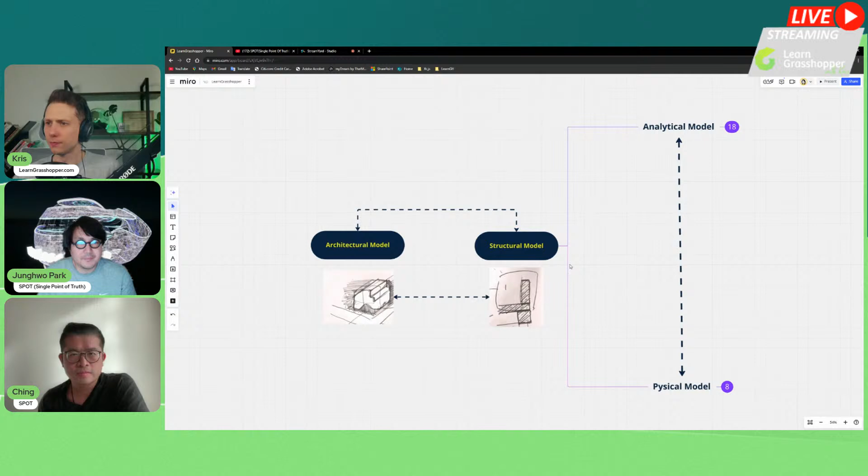I would like to present how architectural planning and structural design at a very early stage can collaborate. In practice, architectural design and structural design coordinate from the early stage, but there are still many challenges because conceptual ideas aren't fully known by either architects or structural engineers. When going from architectural concept to structural concept, the architect designs the general scheme of the building, and the structural engineer takes the core of the building structure and suggests the concept.

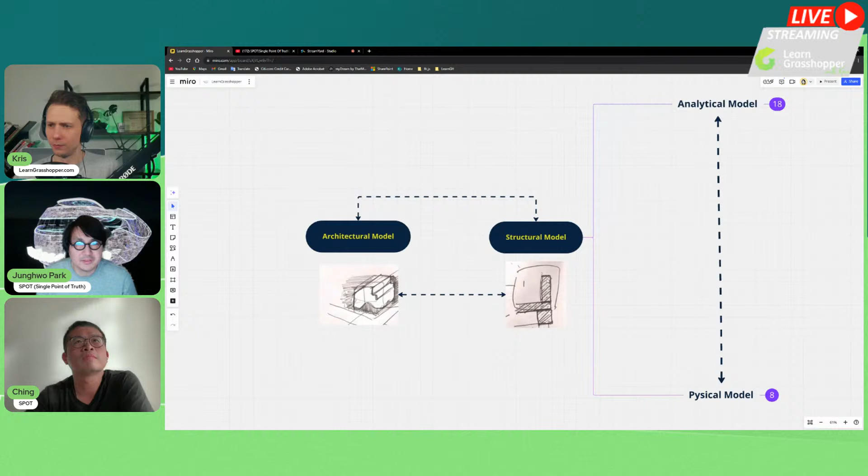In a structural model, we have an analytical model which, for a building project, contains building elements that are different from the physical model. The physical model has exact thickness, material, and parameters of elements, but the analytical model is a very simplified geometry, sometimes even approximated. This is a big challenge in how the architectural model and structural model can communicate with each other.

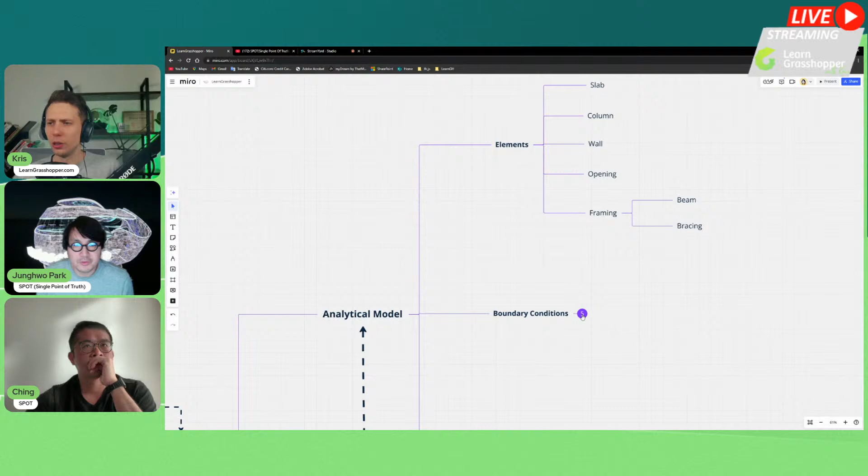Sorry to interrupt. In most cases we have differences between the analytical model and the physical model. Are there chances that sometimes they are the same, or are they always different?

They can have the same parameters, non-graphical information such as material property, material thickness, etc. The only difference between physical and analytical models is that the physical model represents real world geometry. So if it's a slab of 200 millimeters, it must be exactly 200 millimeters, whereas the analytical model is just a simplified surface, but can contain the thickness information as a parameter.

Does that answer your question? Yeah sure, you can continue.

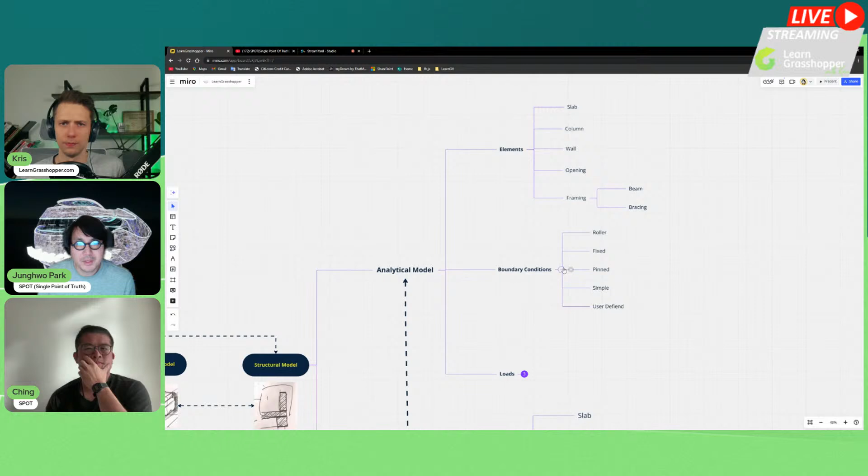Another big challenge I'll introduce later is that the analytical model has to be really precise. If there's any gap between each node of those elements, you'll likely end up with errors when calculating the structural analysis. There's also another component of the analytical model: boundary conditions, where you can have different types, and also loads, where you can set point, line, and area loads, and combine these load cases using specific codes for later calculation.

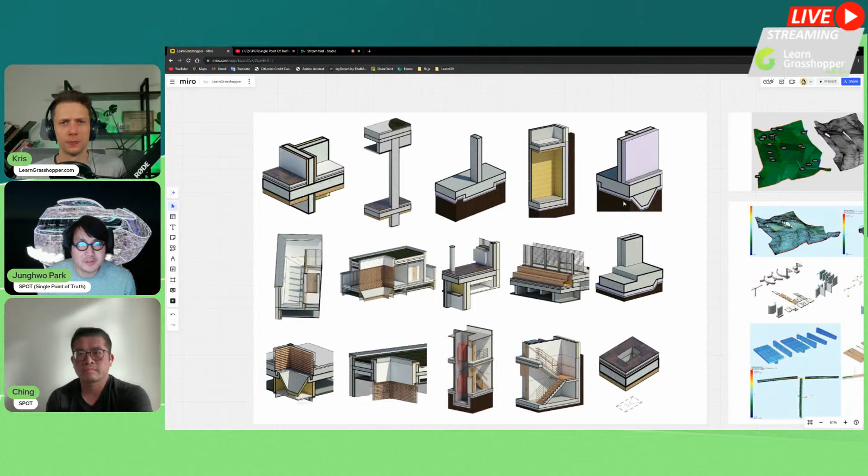Generally speaking, here's a visualization. On the left-hand side you can see a typical physical model including architectural finishes. What the structural engineer needs at the very beginning is to look at the components, and from those physical components such as slab, beam, column, or foundation, they need to simplify or extract the analytical model from that physical model.

This has a lot of challenges in general because there are different use cases depending on the situation. And when it comes to complex geometry, setting up an analytical model without a computational process is very, very challenging.

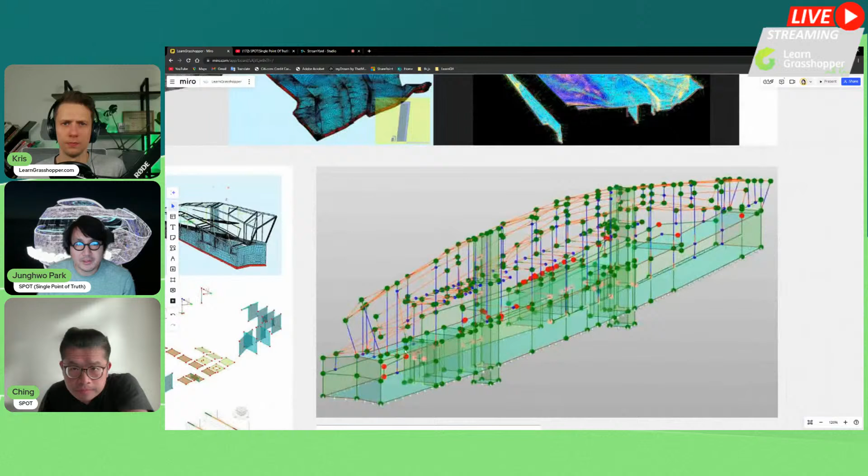Here is one good case. Straight walls or slabs are easy, but sometimes when a framing structure meets complex geometry, having an accurate analytical model is very difficult. If there's any small error between those node points somewhere, we will end up failing to calculate the structural analysis.

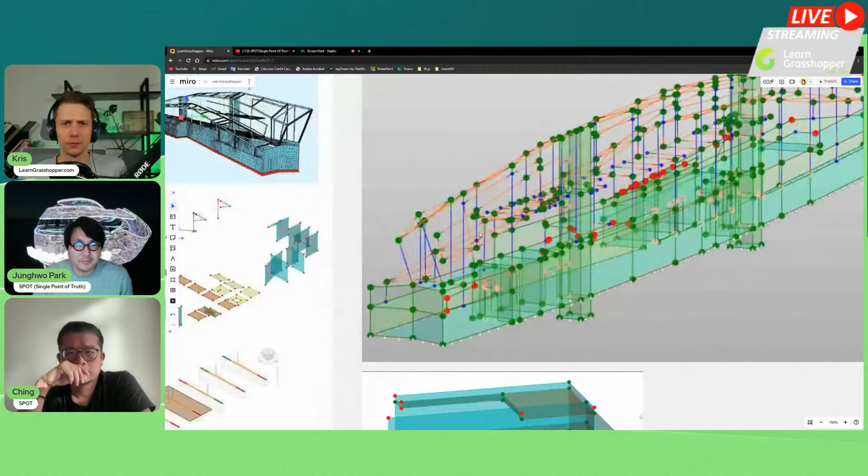So all points we're seeing in this picture represent connections. Every single bubble represents a connection. The green points are automatically connected, the blue points are manually connected, and the red points are not connected, but it doesn't affect the whole structure. This is a graphical representation showing, for instance, the end of a slab or wall, where it's not necessary to be connected.

All right, so I'm going to move on to the Revit screen. Especially today, we're going to introduce Rhino inside Revit, because Rhino has a certain freedom of geometrical operation. We're going to be looking at this in Revit, Rhino inside Revit.

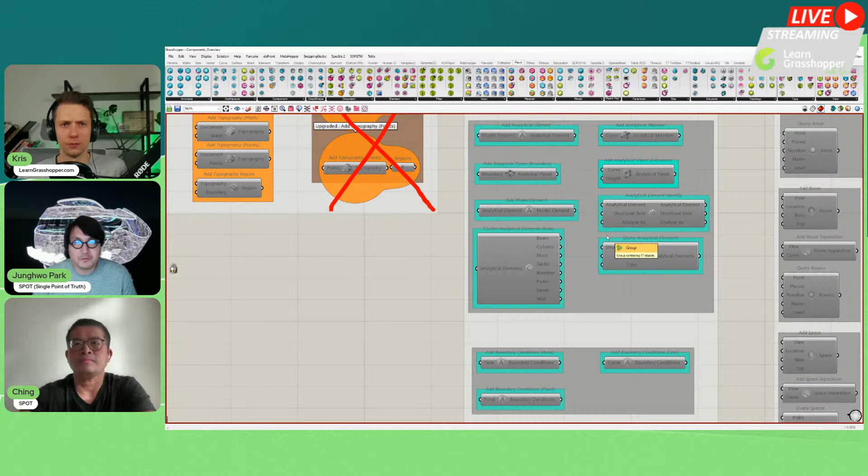It's still a work in progress, what McNeel developed, but we're going to look at those new components which let us create an analytical model from a physical model, or convert between physical model and analytical model. That's very useful, especially in the early stage when you get the architectural model from an architectural designer.

For those who don't know what Grasshopper is, they can think of Grasshopper as kind of like Dynamo, but better - that's a good explanation. I can't really say, but they both have strengths. Grasshopper for sure is very powerful when it comes to geometrical operation compared to Dynamo. Dynamo has certain charming points too, but Grasshopper performs much faster for geometrical operations.

Today we'll focus mostly on geometry. Making structural design is a geometry. Exactly. We have lots of components, but some parts are strictly for structural design. These are the components we're going to look at particularly today, where we'll create analytical elements from a physical model.

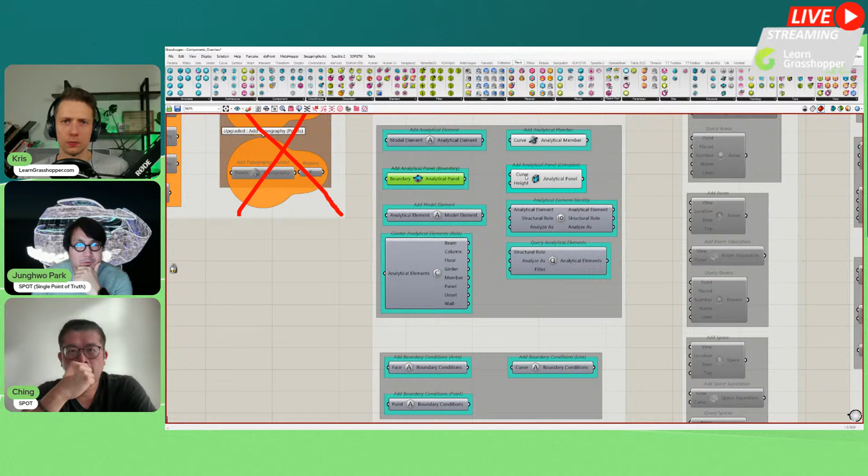Or we can add analytical model from Rhino geometry, such as curves or surfaces. We will convert Revit's analytical model to physical model, and there we can set some kind of boundary conditions. There are still a lot of components missing from Rhino.Inside.Revit.

I assume they're busy continuing to develop those components. For instance, setting up or adding load is missing. Today, Ching will show how to customize the missing components using Python programming.

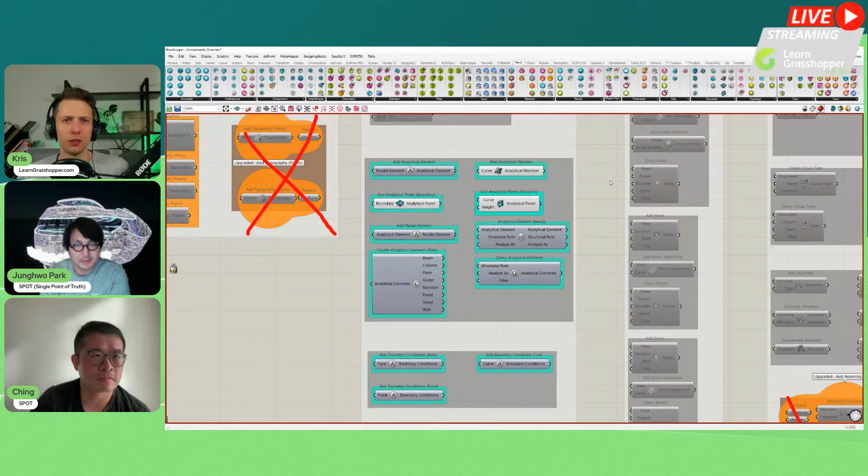Yeah, because this was introduced a couple months ago on this ribbon, and today I'm also going to show you that you don't have to wait until every component is created - Ching will later show us how to create our own with Python. So yeah, looking forward to this one as well.

Yes, so basically if you count all these components right now available in Rhino.Inside.Revit, removing text and grouping, when I counted it's about 456 components at this stage. Really? That's a lot - over 450 components are available, particularly the structural components.

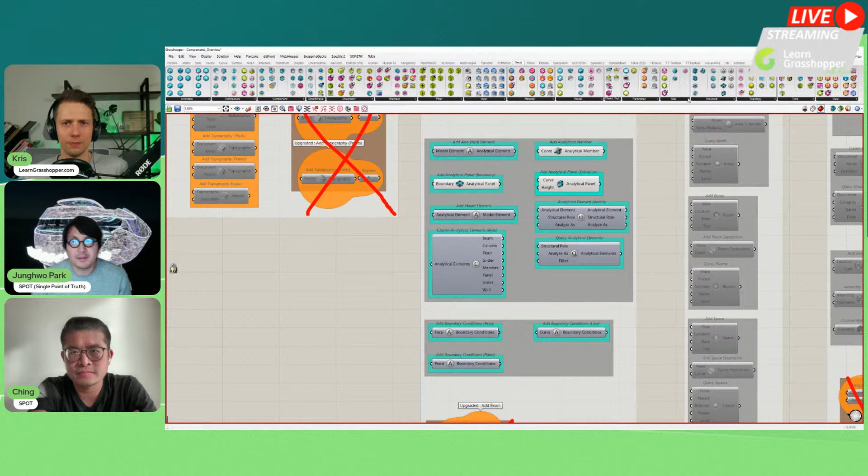Honestly, I first added this as a feature request to McNeel's forum and also their GitHub issue page or ticket page. Luckily, the McNeel developers are very responsive and they really hear what you need. So if you really need a feature request, you can always ask on McNeel's forum, and when it makes sense, they really develop it. I'm really appreciative of JP, Pedro, and Kike who accepted my request for those components and promised to keep developing those areas. So I'm really excited to present this.

But before I show the Rhino and Grasshopper definition, I'd like to explain a little bit in this short video how those architectural concepts or structural physical models can become analytical models at a theoretical level. So I'm going to play my video. Can you see my video? Okay.

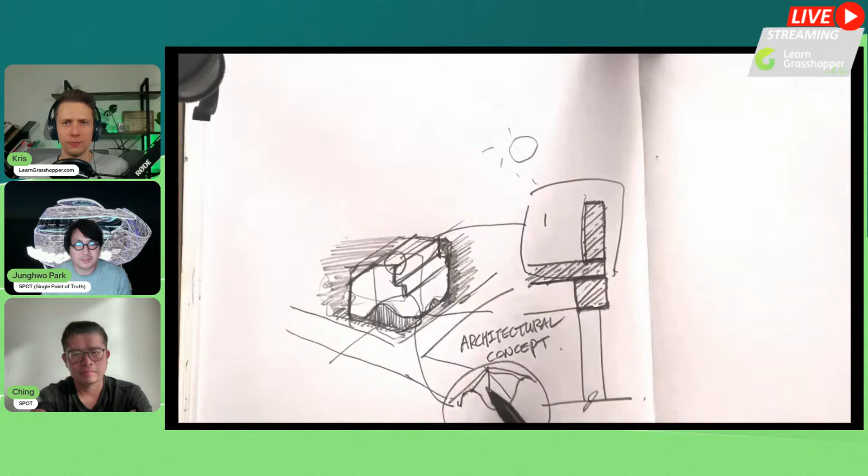Let's imagine here we have architectural conceptual design, and usually structural engineers take that core or shell of the structure and start to prepare what kind of structural concept should match the main structure or facade structure. For instance, here we have structural slabs, and the structural engineer takes these typical slabs, gets the center line of the slab, and creates an analytical surface. If there's a column, they extract the analytical line from the physical model and apply it as a structural column. At the end, you have a very simple static geometry.

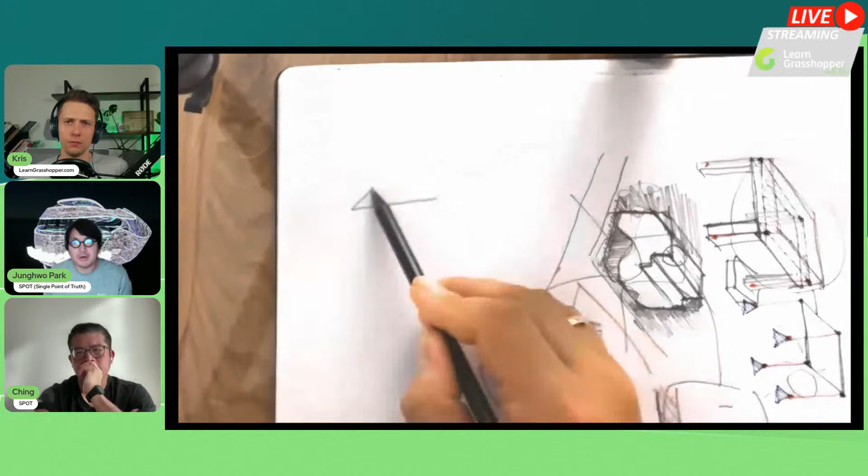We also have to think about boundary conditions. When you have different framing, for instance a downside beam, the beam also has to determine which orientation and where the structural analytical line must be aligned. So the structural engineer has to determine all this complexity to connect all these node points and boundary conditions to calculate their structure.

When the structure goes up and up, or down, there are certain complexities. They need to think about the loads, and the load depends on which kind of load case they assign to each analytical surface or element.

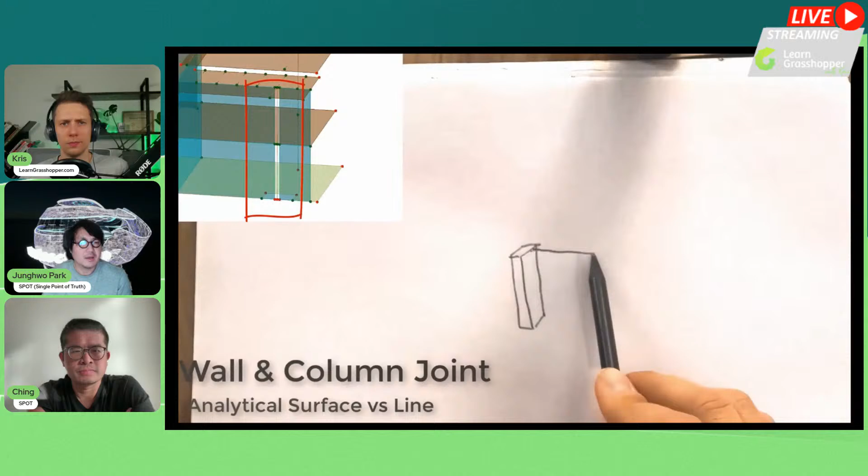When it comes to multiple components joining together, for instance between wall and column, you might end up with a small gap because of the deviation between the physical model and analytical model. Some software requires you to connect them even though there should be a gap, but some software doesn't matter - even though there's a gap, they can recognize the thickness parameter of the analytical model.

What's important in this case is that because the building story is divided, the analytical model is supposed to be also divided according to your building story. If you just create from the first floor up, it's going to be a mistake.

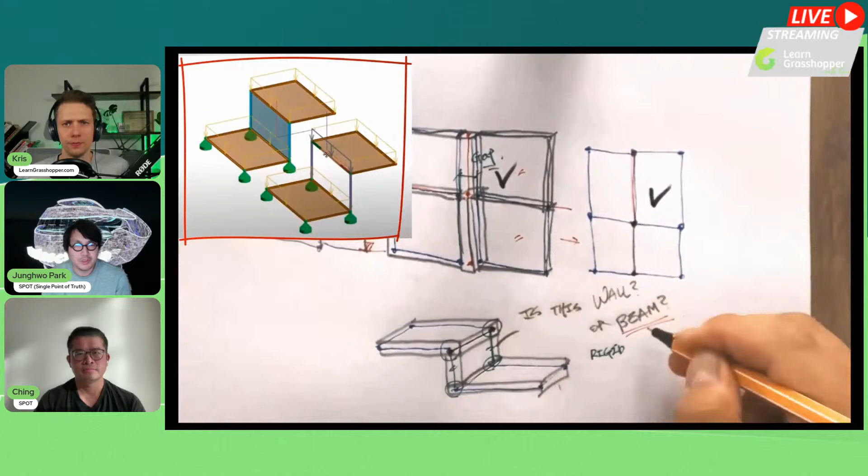Another challenge between physical model and analytical model: when a slab is jumping, you have to determine, depending on the distance, whether to make this a wall structure between the slabs, or should we make it a beam? There are some rigid condition differences, and the structural engineer should determine what's best for the calculation.

When it comes to beam systems, you also need to think about the nodes where they meet. Some software allows you to have a long span analytical line, while other software requires you to split each division. Of course, the node must meet each other without any gap.

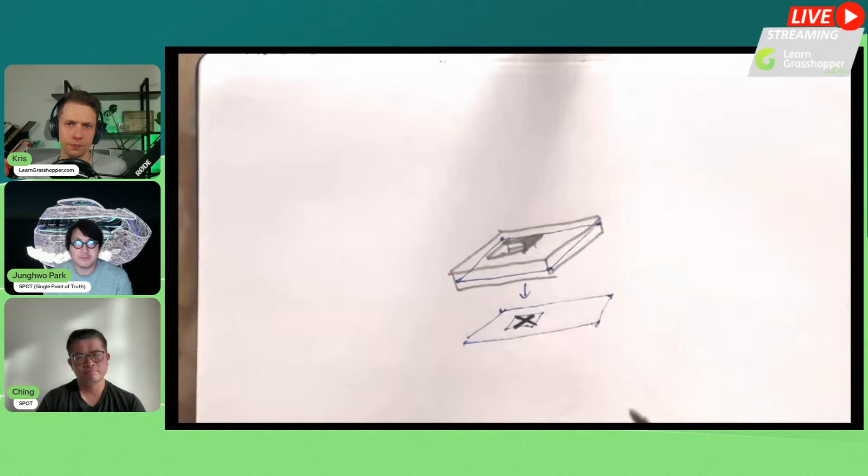There are also many slab openings in the structural model, and when the structural engineer calculates, they also determine whether we need an opening for this, or should we simplify without an opening. This use case is very important for them to think about all the openings around.

When a jumping slab is less than, let's say, 30 centimeters, then they just approximate those two analytical surfaces as one level, so there's not a super complicated calculation situation.

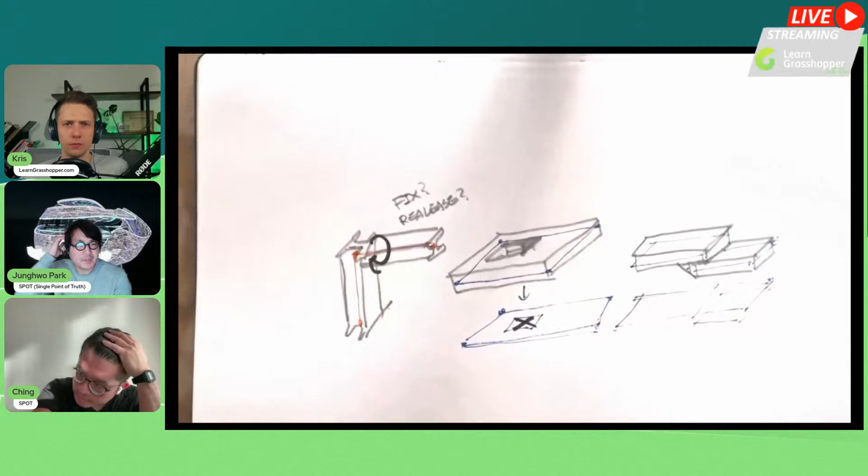When it's a framing structure, we need to think about nodes, and each node can contain different information, whether it's fixed or released, and if there's any rotation. The structural engineer usually takes all these conditions into account.

When there's a beam which is curved, sometimes they approximate the geometry, and this approximated geometry meeting another beam - that beam's analytical line must be connected to the approximated node points. It depends a lot on the calculation software. Some software doesn't require simplification if it's curved, but some software necessarily simplifies the curved beam.

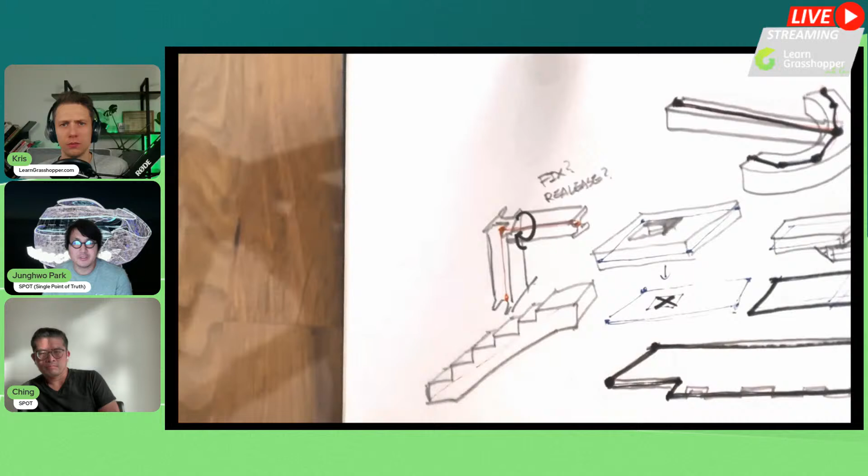When a slab profile is very complex, you can also approximate those complex slab edges and simplify them for calculation. Stairs are also a kind of complex geometry, but when it comes to the calculation for stairs, we just take the core of the stair structure and simplify that surface geometry for the calculation.

So that's the kind of scenario. Of course, when a wall is single curved, we can also approximate it and make it a bit straight in the analytical surface. But when it comes to double curve, then the challenges become very complex.

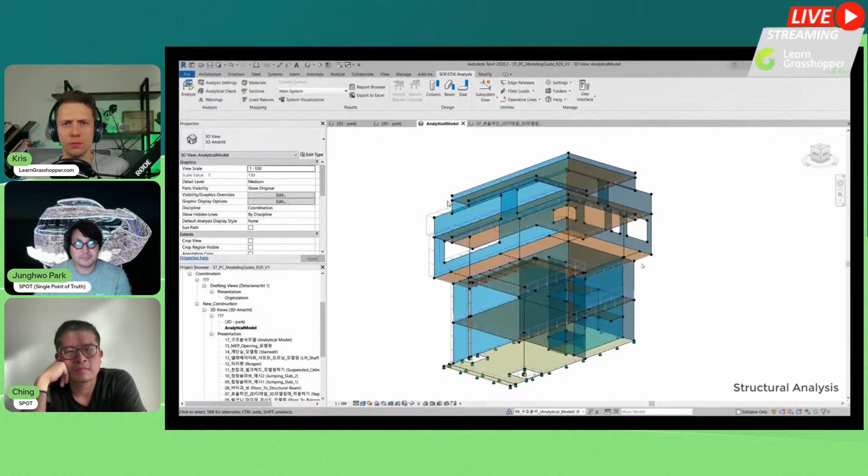As you can see, this is a typical case between the structural model and physical model converted to an analytical model, which you can calculate in structural calculation software such as Sofistik or Karamba 3D, keeping communication between the BIM model and calculation model.

So let me go show you the example that I prepared. Just before that, I have to say it's a really amazing video that you made. I assume you made all these drawings and this video.

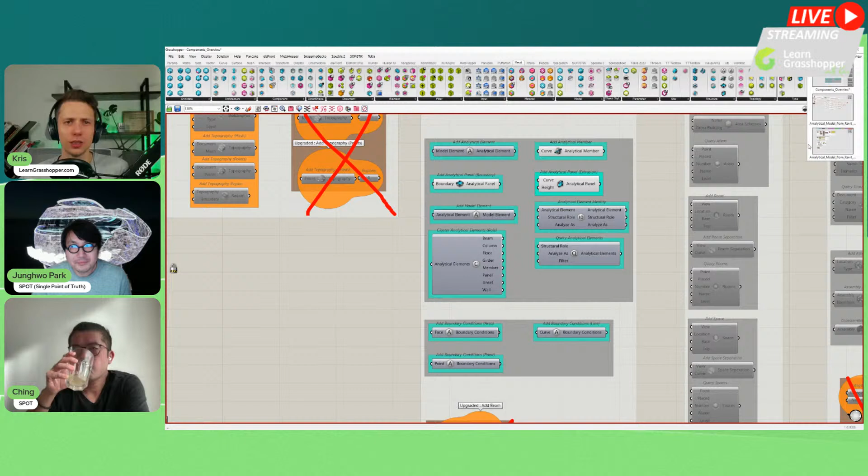Yeah, I did it. It's really a great knowledge refreshment for structural engineers, but I think it's also really important to understand the logic for architects. You're both architects - how much knowledge do architects need about this structural design simplification usually? Do architects care about it, or do they not care about all this structural design? I have to say it really depends on their partnership with the structural engineer.

What I observed in my last 18 years of experience is that these days the communication between structural engineers and architects is very smooth, and many companies work together within one organization. So in my opinion, this kind of culture or workflow is more and more encouraged between architects and structural engineers.

From my experience, I was working for a structural engineering office, supporting structural engineers to have such a model so they could just focus on calculation. It was lucky I was about 2.5 years working there, and that was quite enough time to gain this knowledge.

I think if you have structural engineers as a collaborator, then architects can always ask those questions to enhance their efficiency.

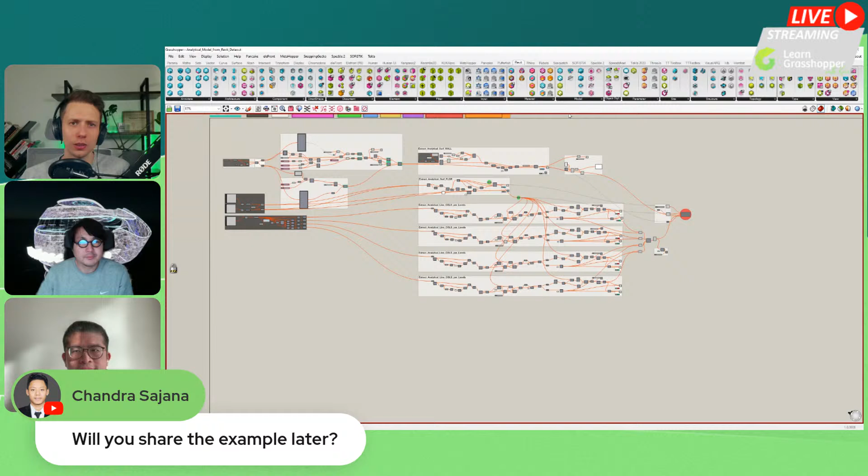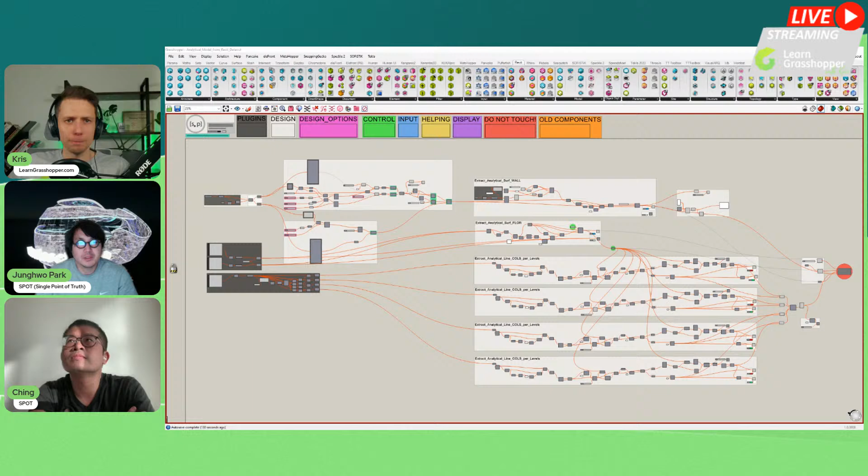So let's go to the main topic today: how we can use RHINO inside Revit. Normally if you have a standard Revit model and want to create an analytical model, these are two separate things. But bringing RHINO inside Revit lets us make one model that connects the two softwares. Imagine this is a very conceptual, simple model modeled in Revit.

I'm just about to extract an analytical model using RHINO inside Revit and generate that analytical model from the Grasshopper components, following the exact same theoretical part I presented with the drawings. I may not have enough time to explain everything, so I'll explain only the key points. At the end, we'll get this analytical model out of Revit components.

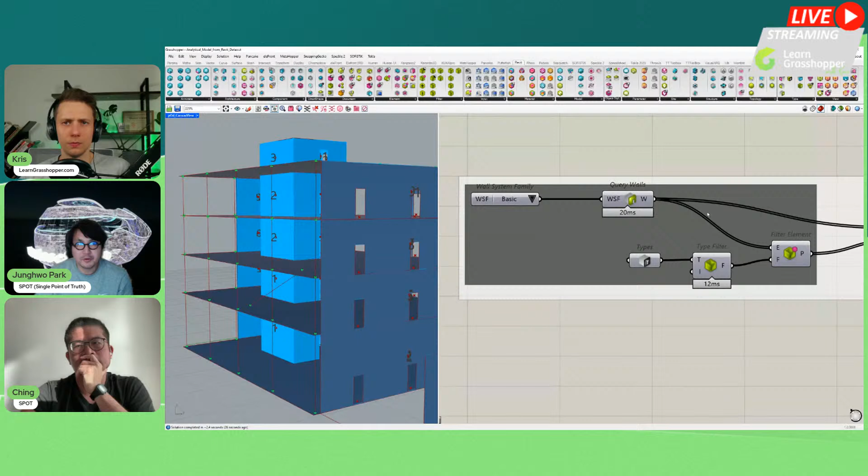What I'm doing here is first we filter and query the walls, floors, and columns. Based on that Revit geometry filtered from the RHINO inside Revit components, we distinguish certain parameters between the exterior side and interior side.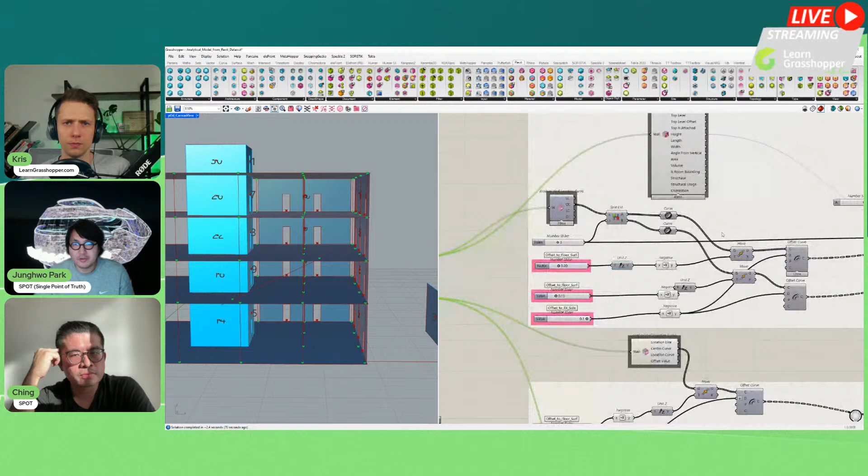When you have geometry filtered from the exterior or interior wall side, it's kind of obvious, and the geometry is now recognized as a Grasshopper preview. So RHINO and Grasshopper can start to understand these Revit elements as RHINO and Grasshopper geometry. The rest of the operation is mainly Grasshopper logic.

For instance, I just get the center line of the wall surface - in this case I push it to the slab edge to connect them, but we can control whether it's aligned to the middle, left, or right face, all using Grasshopper.

So what I'm doing is getting the wall structure, and then we extract based on the wall location line from Revit's wall geometry. From there we reference the wall height from RHINO inside Revit components, analyze the wall, and apply this height to extrude the surface in Grasshopper.

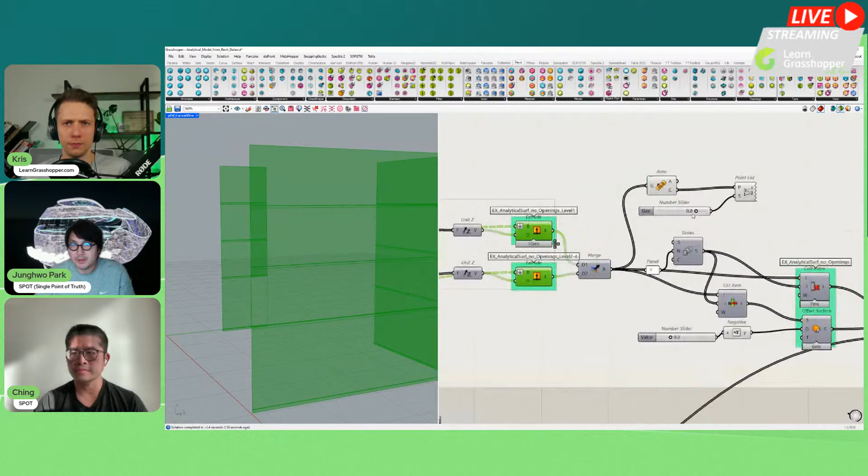There's a slab thickness that needs to be met between wall to wall, and we just do a simple calculation in Grasshopper to get that result.

You can see we can have an analytical surface without any openings, but we can also work with openings by extracting window or door opening information. We just do a simple Grasshopper operation to get the openings, and at the end you get that geometry with openings. We can set the design option - sometimes I want to calculate everything without openings, sometimes with openings.

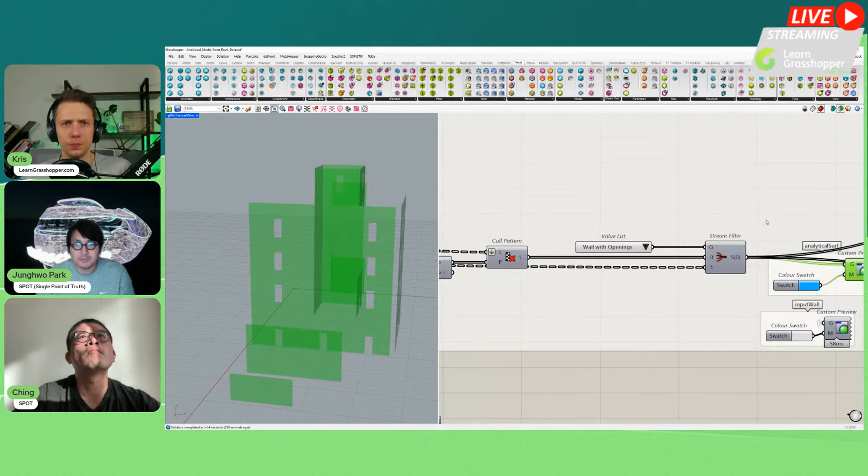We're using only native RHINO inside Revit components - no Python scripts. Everything is native RHINO inside Revit and Grasshopper components, no plugins apart from that. It's also important to mark: if I use a specific plugin, I always group them with a particular color from this template, so we can indicate which components use a plugin apart from the native Grasshopper components.

The same story goes for floor - we extract the floor from the built-in category, query them, and convert them as Grasshopper geometry. There's a difference between slabs and foundations, so we can differentiate.

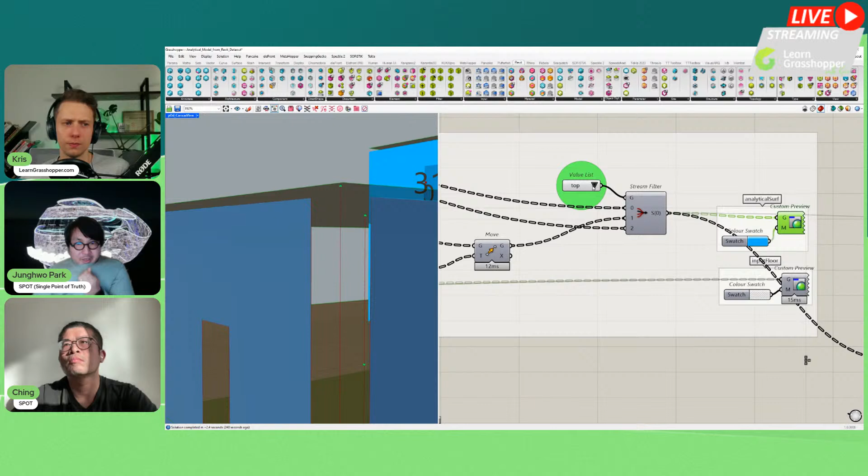At the end we get the analytical surface of the slab, and we can determine if this slab is going to be center, bottom, or top. Right now the script is matched to the center of the slab to align with all the verticals, but it's all possible to parametrically adjust this analytical model.

And I'm also extracting columns based on a particular parameter, and we just split that geometry of each level for the columns.

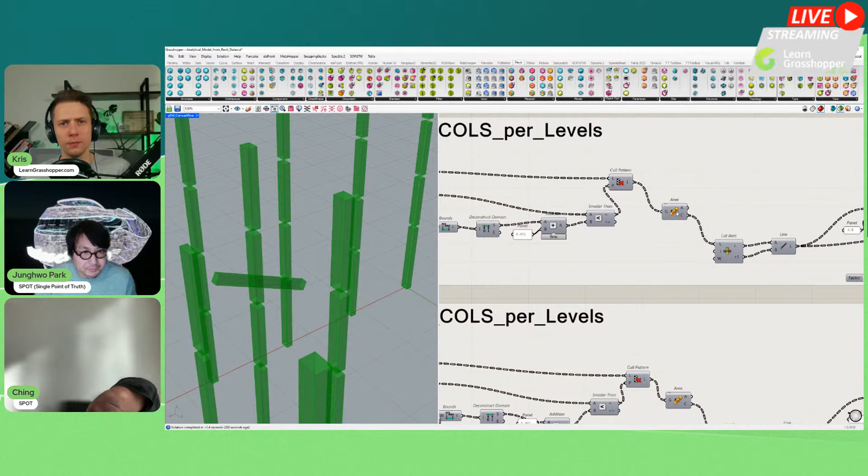What the rest of the script does is get the center point of each column, and we connect those center points as a single line, and the line needs to be extended to the slab level.

So we scale it up, and we shatter only the core lines we need for the calculation, and then we convert all this to a final analytical model.

So let's say whatever, if you have columns modeled in Revit in different ways, let's say as families, you can always make some simplification and build your analytical model as you want.

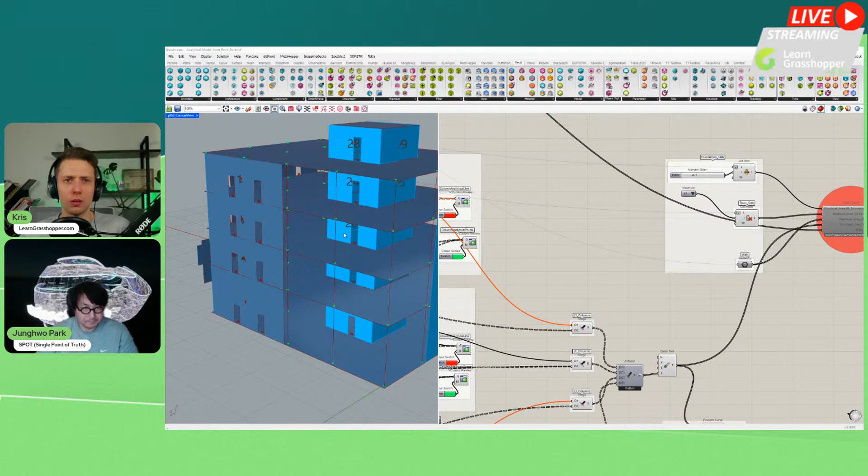For example, this script, they are linked to each other. If I move my column here, simultaneously you will see the column analytical model move according to this physical model, and when I move it back, the communication between them is very clear.

And as you can see here, the nodes show green points, meaning it's connected between the slab and the columns.

Is there any function from Grasshopper that if the point meets a surface it turns green? No, I just visualized it with a colored point, but it's when the point is meeting the surface.

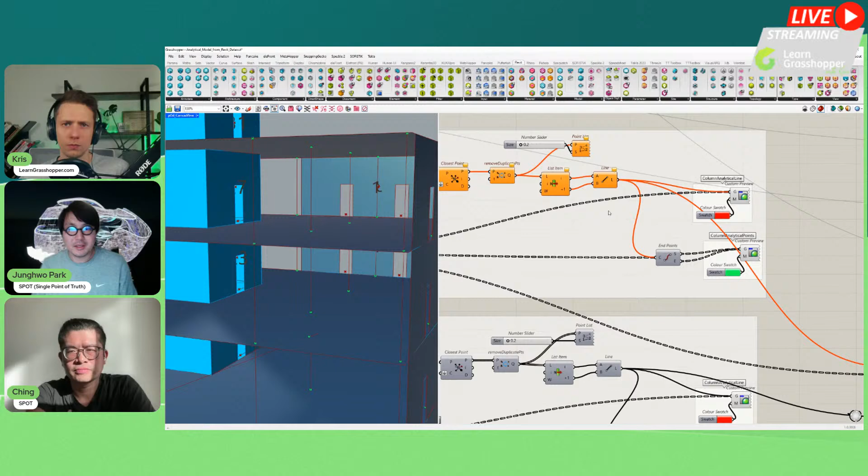We can set up a clash component, and when the clash component shows the number of clashed points, we can highlight it with color for example. There are many other solutions we could think about for quality control, but at the moment here in this script I'll just display it as a green color.

Yeah, and I really like what you showed when you moved your column in Revit. I think this is the most important thing because of all the changes, and it works also if you work on a multi-server with different users, right? If someone else is moving, let's say, a wall, door or column, it will also update your analytical model, so you will get new forces and so on.

And this is, in my opinion, one of the biggest advantages of using this connection. Exactly, that's the power of this parametric engineering, let's say.

And there are some components highlighting errors just because there is no relation for this particular model, but it doesn't affect anything for the later script.

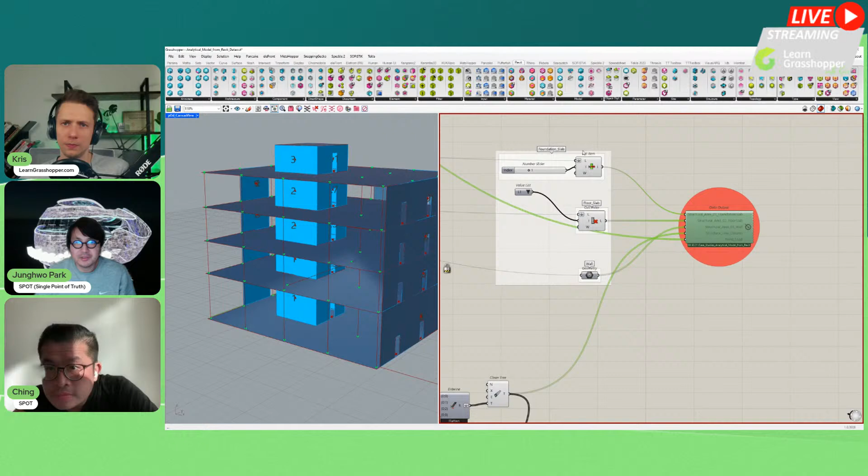And I often prefer to separate between the topics. So in this design definition, I'm just extracting only the geometrical model from the physical model. And what I use in this component is called data output. I can set the destination to stream the change into another Grasshopper definition.

So that one I'm going to introduce is here. I'm going to use data input components to stream any change from the previous script, and I can only focus on this analytical model part.

Sometimes I prefer it this way because of the file size and also performance, and it helps to maintain a separate script rather than one big chunk of script.

It's already really good. It's a really good tip because you don't have to work on one big Grasshopper file. You can separate them into different small files, which are of course faster, and you can open and maybe send them to a different person who can work on a different Grasshopper file.

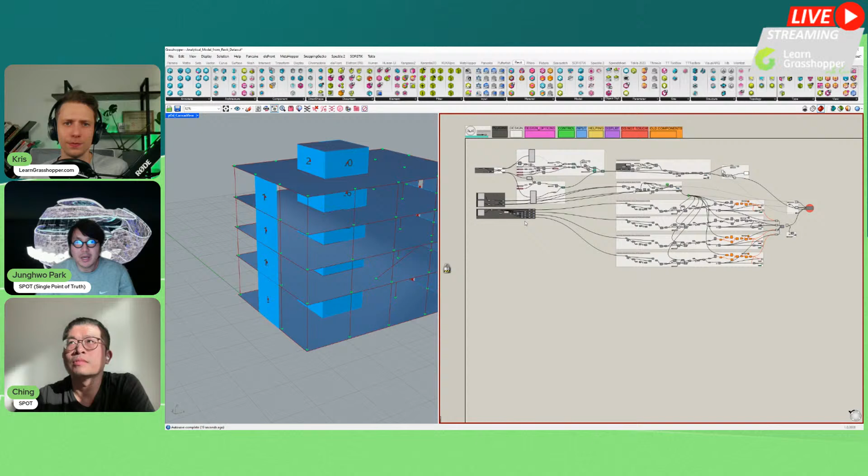Yeah, exactly. I can imagine this part of the definition is the architect's work who collaborates with their structural engineer. And the next script part is more the scenario of the structural engineer who obtains the model from the architects.

I'm just going to show you now. So if we use this data input component and define the source, this example's data output file format is going to be available anyway. If we link it, then it will stream any change.

Let me go and change from here. I don't need to actually change the Grasshopper. I'll just move one of the columns as I did before. But before any action, I would prefer to always lock the solver so we don't compute the Grasshopper definition.

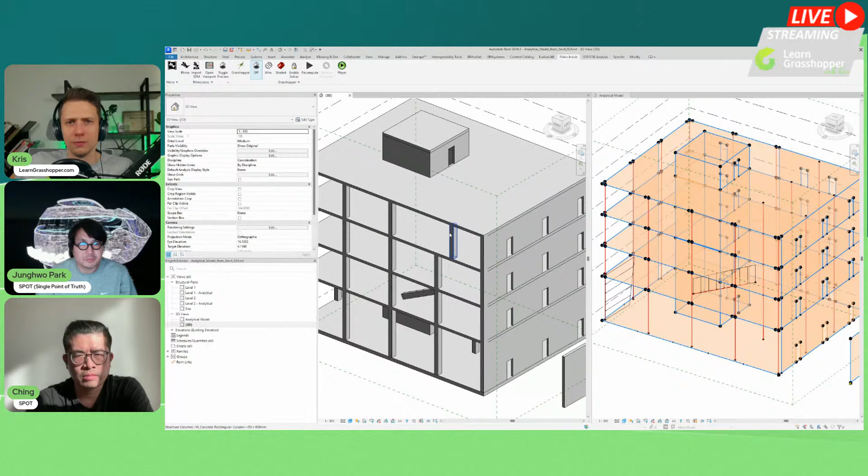So we just move it in the Revit model here, and I'm going back to our architect's script, let's say, to perform that script. So you can see where it is - one of the columns must be shifted, as you can see.

Can you zoom? Can you zoom in a little bit better? Yeah, we can see it. I have to focus on that, and if I enable this data output now, let me just unlock the solver.

I'm just moving to the scenario of the structural engineer, and let's see in this case now. You will see, I'll just recompute one more time. You should be able to see.

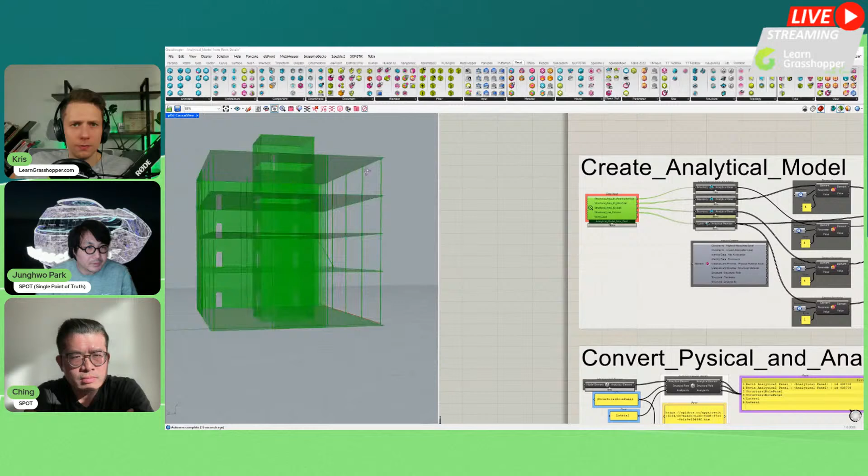Maybe it's because I didn't specify that it was like that. Let me change the source file, and when I come back to these components, maybe now you can bake it, so it will be easier to see. I'll do that. So when I now synchronize that source file, let me bake it to Rhino here.

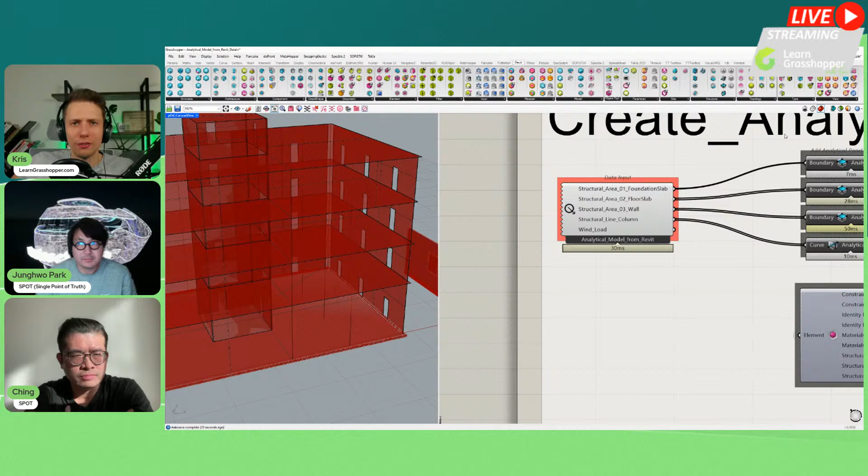Sorry, the script gets a bit heavier. But it's really great to see that different designers can work on different Grasshopper files. Exactly, so we can also open the Rhino viewport directly from here. And if I visualize now, you'll see this column shift to here. So that's how we can coordinate between the architectural model and the structural model.

I'm a little bit afraid of time. Sorry, I think it's time. No worries, we have some questions. So before that, let me see.

We have a question from Ferenc. Slab opening can be for window and for steps. How can Rhino make a difference between them, on and off? It can be important for the wind pressure model.

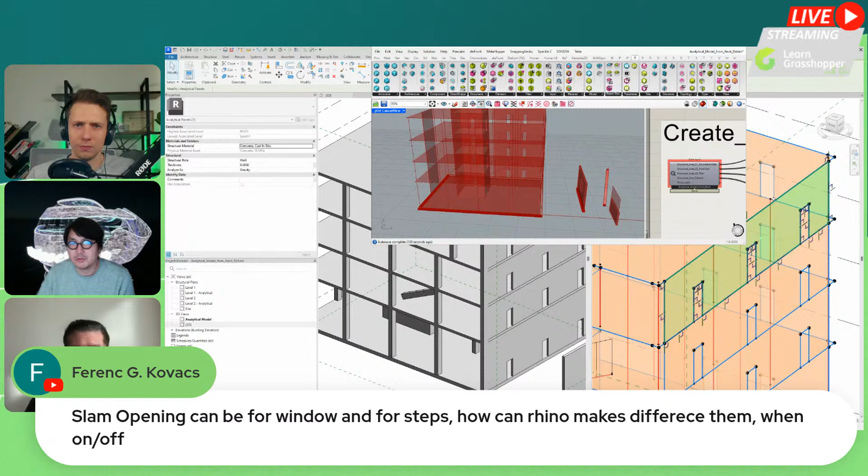I'm not a structural engineer, so I cannot answer accurately, but for instance, if the facade has an opening or without an opening, it will impact the loads where the surface is hit by wind load, or when it's flat, with opening and without opening, when we apply live load on a particular use of living space, that opening would impact the structure. I'm showing a very conceptual stage here, just to demonstrate these components are working. But in Revit, when you eventually have an analytical model, you can also go into the properties and mark if opening applies or not. You can mark a yes or no parameter to close an instance of openings. I wouldn't go so deep into these details, but I think it's explained.

One more question from Joel. Is this model in Revit project based on the base point? If the model in Rhino is at 0,0, can you move the model in Revit base point as well?

That's basically a good question. So the coordination point is always based on Revit's internal origin. Rhino will always inherit the internal origin from Revit, and that's 0,0,0 in Rhino. And whether the model uses the project base point, survey point, or shell point, whichever goes away from this origin point, it doesn't matter for Rhino. Rhino only takes this point as a single point of truth.

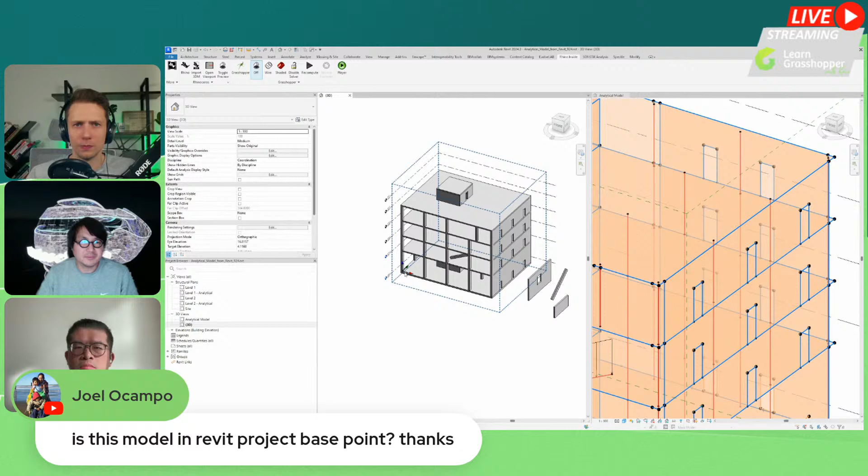Okay, cool. Yes, thank you for all the explanation. Let's continue to your presentation. Yeah, so I still need about 5 more minutes, let's say.

So for the rest, let's say we have geometry from Grasshopper, which is slabs and walls. It's a very simplified surface and line. And we can just convert this using the analytical boundary panel. So the surface is just converted as Revit's native analytical model surface. And I'm just adjusting here a little bit of parameter.

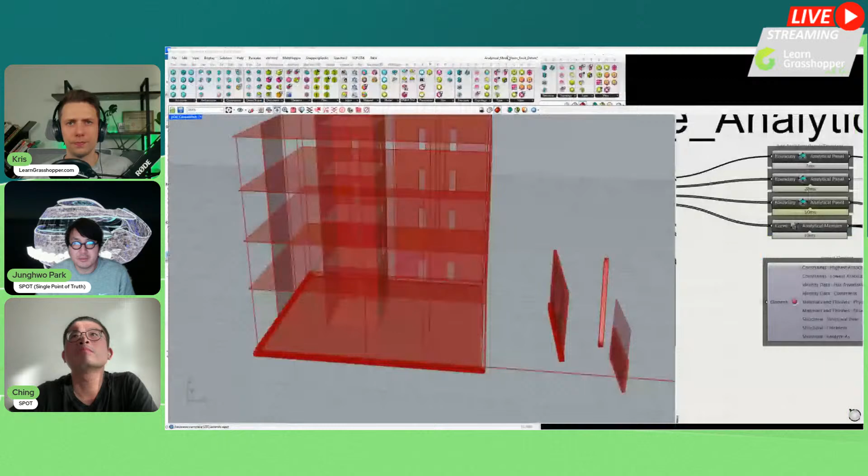For instance, we can set the structural role. If you click on the analytical surface, you see there is a structural role, where you can define different roles. With Rhino.Inside.Revit, you have the opportunity to get and set parameters for Revit, and this particular component does that job. Here the value is not a string, it's just an integer, because the value Revit shows is a written string, but the API in this case requires the integer information for structural role. That's why I put the number 5 to represent a wall element.

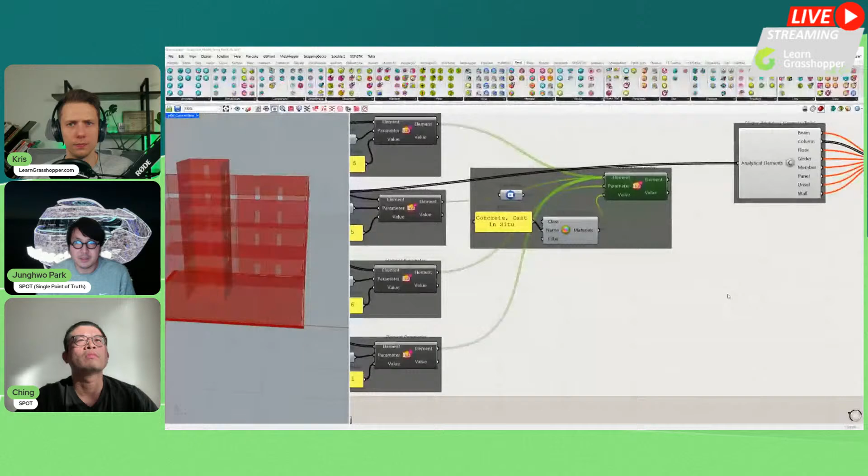And you can also set the material parameter for this analytical model. For instance, each analytical model can include structural material property, and you can also set thickness for those analytical models. All of this is possible using Rhino.Inside.Revit.

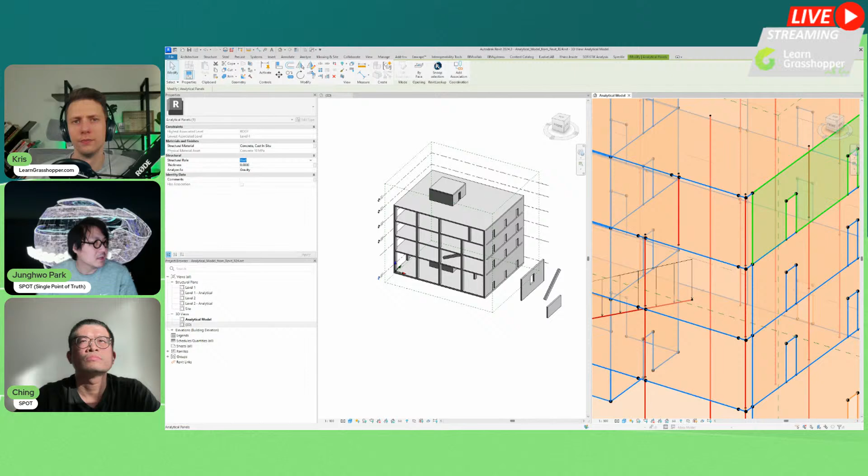And also, when you look at this example, we can also convert model elements as structural elements, and the component here shows what parameters we need and what kind of analysis we should treat this element as, lateral or gravity, and we can define all this detail. Just for your info, for instance, analytical element structural role, when you look at structural role again, it will simply show wall. But again, this is just Revit's information panel. What we really need as an input is the structural role panel.

And for this, I have a link here. If you go to this page, you will see the Revit API documentation.

So you can find all this information, how all the objects are named, the syntax for the names - that's what you need for the input to set the structural role. For this enumeration, you have to look up the current Revit API at the moment. And we can set boundary condition as described. I think this example, if you follow it, is very straightforward to do.

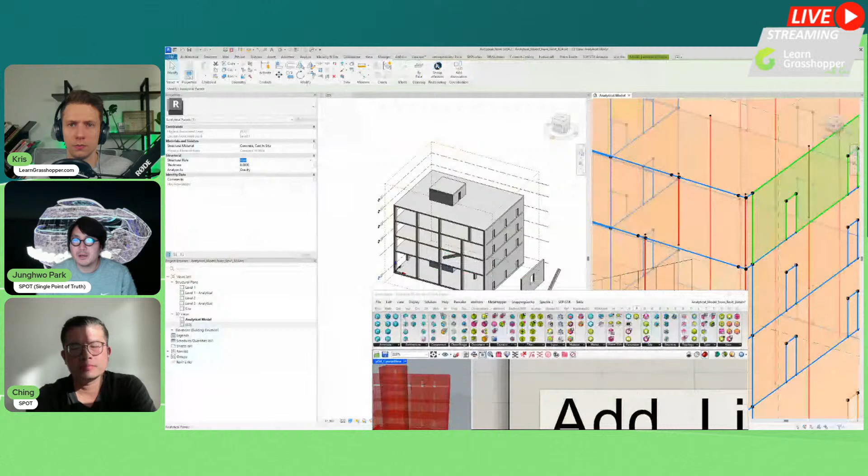We can also set the line load. This component is not provided - my colleague Ching customized it with his programming skills. So I'll show you, I'll close my presentation here. You can basically extract the Revit physical model as an analytical model, and if necessary, apply this kind of custom function using Revit and Rhino API.

So if there are no more questions, I would like to pass my presentation to Ching. We still have 4 or 5 minutes before Ching's presentation, so we can answer some questions. Mario just wrote that he doesn't use Revit, but he can see the concept can be applied also to Tekla instead - good stuff, very inspiring.

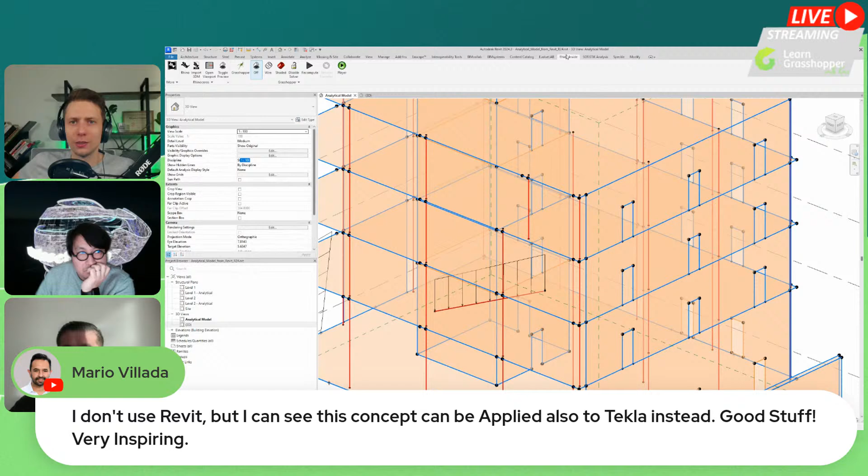And yeah, this is really true that it doesn't have to be just Revit. That's the beauty about Grasshopper - it's such a good bridging tool.

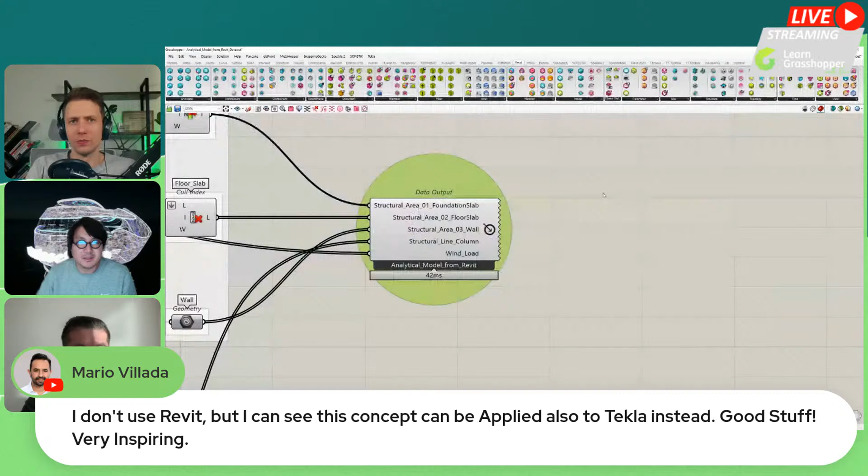For instance, this output from Rhino.Inside we can also connect to other Grasshopper components, and you can directly calculate the model without any effort from the structural engineer - for example, Tekla Structural Designer or Karamba 3D, all those have a live link between Grasshopper and their platform.

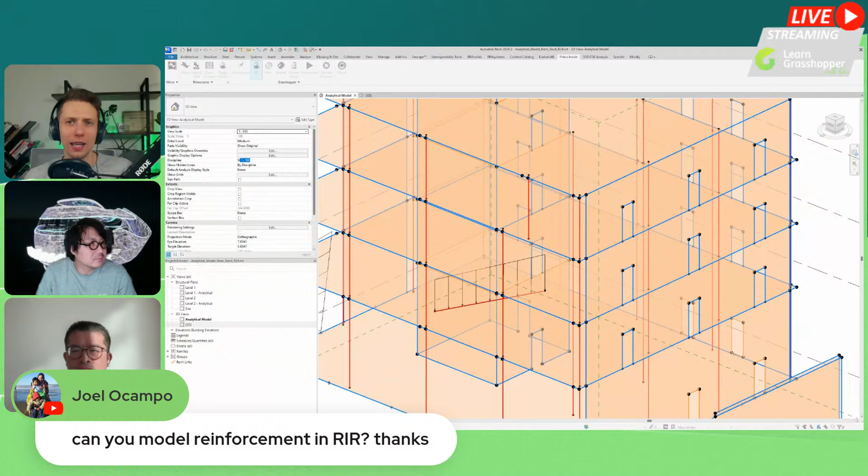Just a question about reinforcement - I know it's always asked: can you model reinforcement in Rhino Inside Revit? To my knowledge, as of today there are no native components in Rhino Inside Revit. However, there are already some workarounds where you can go directly with C# or Python inside Grasshopper and connect to the Revit API to model it.

Do you have any experience, Junghwo? I think Ching will introduce mainly one use case today, but as long as the Revit API is available from documentation, you can actually just program it. And the beauty is, if demand is higher, we should definitely ask the Rhino Inside Revit developers, and they will definitely listen.

Because Rhino developers are also checking what is happening on the forum, and today there were already 4 questions about reinforcement. So there will be more and more people asking about that, and they will see there is a need for these components. So today, in just 2 minutes, Ching will show you how we can deal with this without the native components.

Just 2 more questions, let me see - do I need to complete my Revit model before exporting it to Rhino? No, there is no export. Everything is data-centric, based on this streaming format. There is no import and export required anymore.

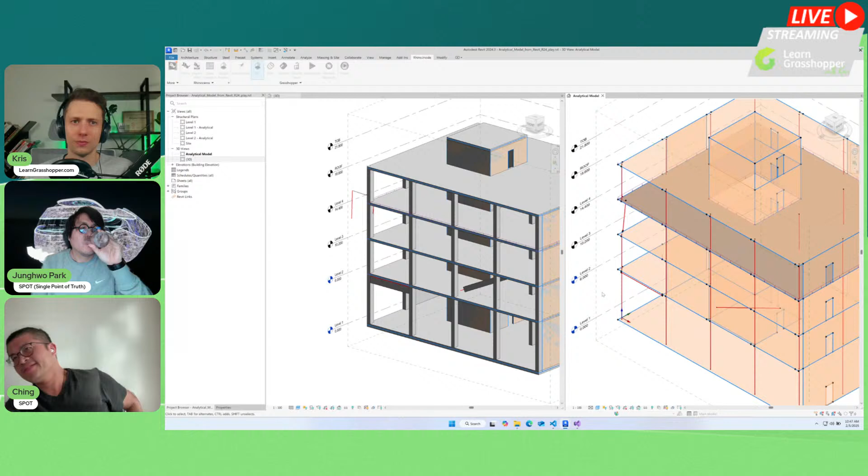Then I will show this topic. I will just use Junghwo's model to show how to add load, using a Python script, since we all talked about the missing component from RHINO inside Revit in Grasshopper.

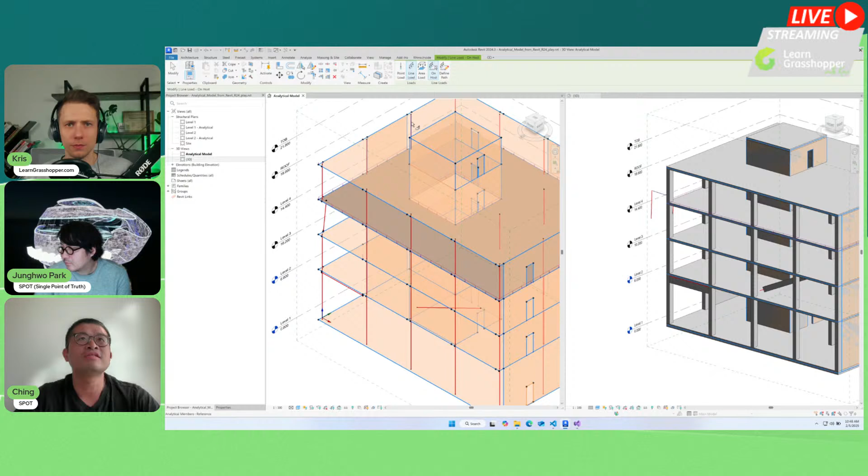This adding load is missing there. If we would do it by hand, because I'm an architect, not a structural engineer - I will select an analytical element, go to analyze, and add the load to it, and there will be a line load. Then you can select this line load and go to properties, where you can change either to not uniform, or add different kilonewtons in different directions, in force or moment.

Today I'm going to demonstrate how to do this part - just grab one analytical member like this line to add this line load in this beam, and also how to unlock this parameter so you can make uniform load into it, and also add different force in these different directions, just using Python.

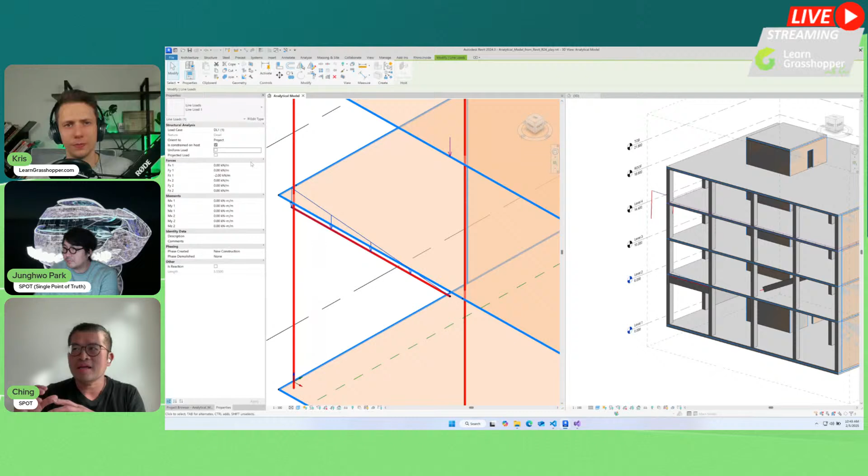And later on, I will show a little bit that you can also separate your Python script and put it mixed with existing Grasshopper components. So let's get into it.

But firstly, I want to show a little bit of the structure of RHINO inside Revit. Maybe a little background of myself - I worked a long time in an architect's office, and I'm an architect turned software developer, especially for RHINO and also for Revit. I did lots of plugins for Revit using the Revit API, so I'm quite familiar with it.

Today we're talking about RHINO inside Revit. RHINO inside Revit is actually an external application for Revit from RHINO, so RHINO uses this bridge to connect to the Revit API, and also gives the opportunity to use Grasshopper and its components, and in the Grasshopper component there is a Python script component where you can also write Python script, run it into Grasshopper, and because of this, so you can

grasp directly to Revit API through this Python component, just by importing modules, and it's much more easier. This is how I learn text-based programming inside visual programming.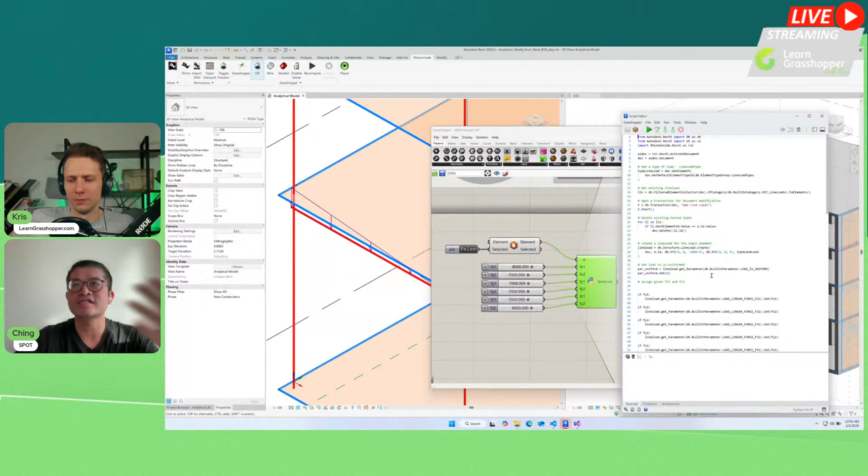So this is a Python 3, I suppose, that is available in RHINO 8. Oh sorry, now maybe you can also search for this component, just type Python, and you will find this component as Python 3 script. And then if you create one and double click it, you get into the script. Everything you write inside this, it will run also in the background as a part of this external application - I mean the RHINO.INSIDE.REVIT - as a part of the command.

And I will just go very quickly through it. Like I said, I really like to get into the main point of what I'm doing. So I will grab some elements like this line load into my script. It would just be this input of E, and I would just...

Can you just please make it bigger so we can fill it in the full screen? If you can also make the font bigger with control and the scroll, a different way. And if you make it wider, so we can see better. About this - it's much, much better. Okay, for those watching on YouTube, you can also zoom in a little bit. All right.

For creating Python scripts, usually you have to import the modules, the tools you want to use, like the libraries. The first two lines tell Grasshopper, hey, please import Revit database namespace, which is also the name of a module that you can query what you want and modify what you want to do in a database. And also the UI - this is a library that you can use to manipulate the Revit UI. This is also an important library.

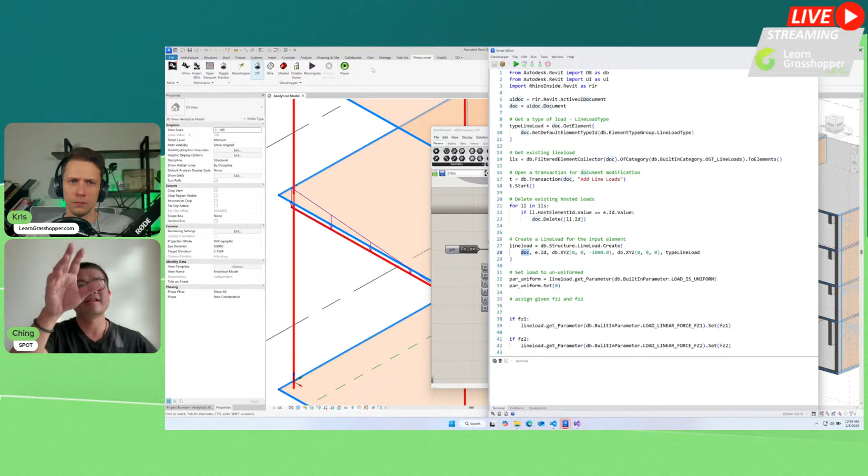So the question is now, okay, the document - we can get it from this library, like we said. The UI document means a document for the whole buttons, all what you see here, and all what you see in the viewer, and the toolbars and so on and so forth. And from this UI document, which is the active document, is what you're opening now. Under this, you can get the Revit document, using UI document. So this is the Revit document, the file that you're dealing with.

So you don't have to install anything. It's just enough writing import, and it's connecting to Revit automatically. Yes, exactly. And then the second thing that you need is the element.

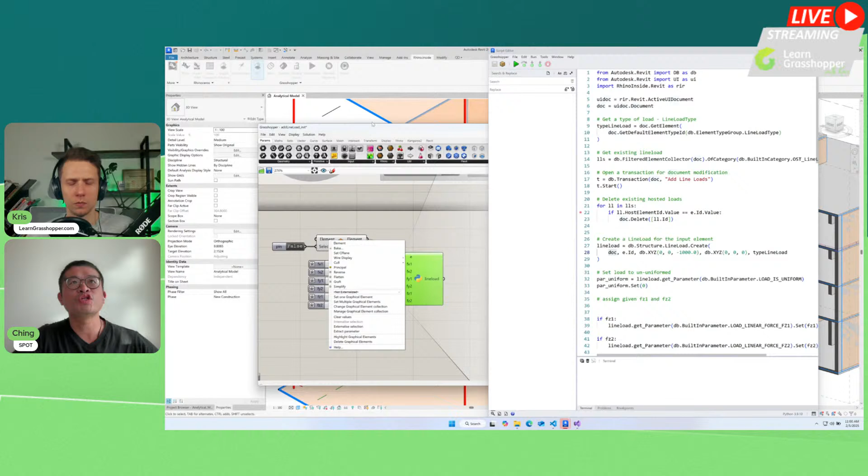Oh sorry, this element is what we passed through the input, this E. This E is like the element that I selected by right-clicking on it and setting one graphical element. Then you choose this, and then you choose this analytical member. I will just do it now, you can see. So you have to choose this one.

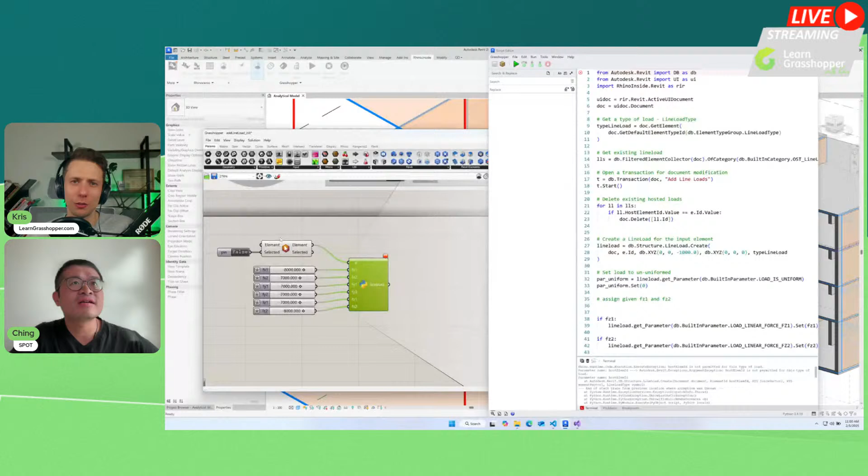Oh, there's some error. Oh, we don't like bugs. Maybe you haven't clicked the right element, maybe. Let me see.

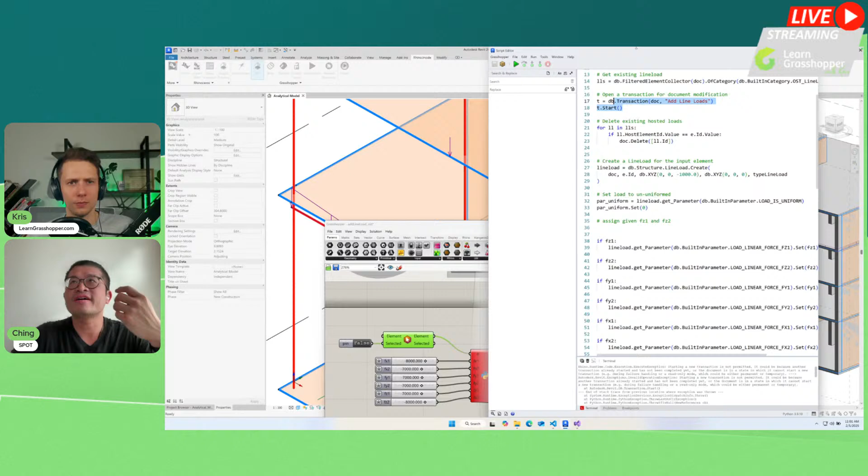Oh, this is some error that usually you will meet because of the transaction part. This is also an error for learning because of Revit. If you want to change anything in your Revit document, you have to open a transaction, start it, make your change, and then commit it. If there's no error, then the change will be made. However, because this Python script is inside Grasshopper, and Grasshopper itself already opened a transaction, if you want to create or change anything, you need to open another transaction. This is some problem where Grasshopper or Revit gets confused about which transaction is now open. So it's saying starting a new transaction is not permitted. Usually it worked, but because I loaded this script already and changed the element a little bit, it got a little confused with this other transaction.

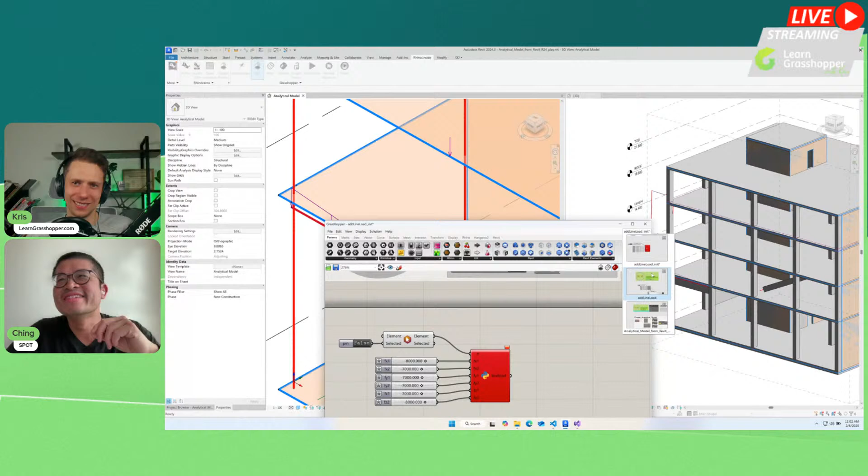However, you just close it, and that's the old trick that works - if you open and start again, it works. Yes, it works. But I have prepared another one so we don't need that in case. Let me see if it works. Oh yeah, it works. Oh, thank God. Okay, I can still open this one.

I prepared this other one because I want to show the mixture of a Python script and a Grasshopper component. I'll make it a little bigger again. Even bigger, if you can. Yeah, okay. How about this? Yeah, it's okay, alright.

We said we want to create a line load, so we have document and element ID to get into it, and the force and the moment and the type of line load. This is the part I want to talk about, because you have to give a type.

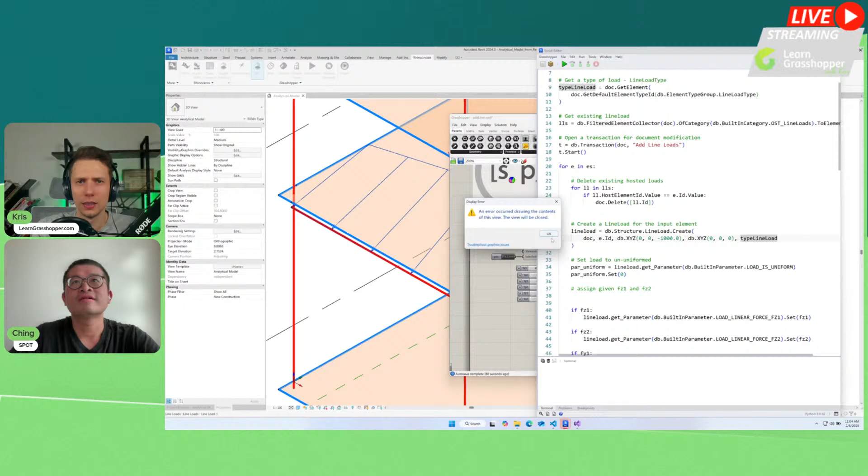If I select this one, it's already created, and I go to... wait. I think this Python script was disabled. Oh no, I have another one there. Sorry, I just want to show this.

I select the line load now, and you will see the line load also has a type, so you have to pass the type to it. How do I get this type? We can grab a default element type ID. These two lines - I have a variable called type line load, and I go into the document, get element, query which kind of element I want to have the default element type ID from the document, and pass through which kind of element type group is a line load type. So I will have this type line load, shown here as line load 1, and I just have to pass this to the method, and it will create this line load.

Okay, this is the first thing. The second thing is I want to change the parameter - first this uniform load. I wanted to make it ununiformed. Basically, if you just create a line load by hand, it will be uniformed.

So you have to get the parameter - if you can see it here from the properties, this is normally a built-in parameter. You have to go through the built-in parameter, it's called struct, and you go through the whole list of built-in parameters to find 'load is uniform'. Pass this built-in parameter to the get parameter method, and then you'll get the uniform parameter, and set it as 0. So 0 or 1, which means true or false - pass this 0, then the uniform load will be unchecked.

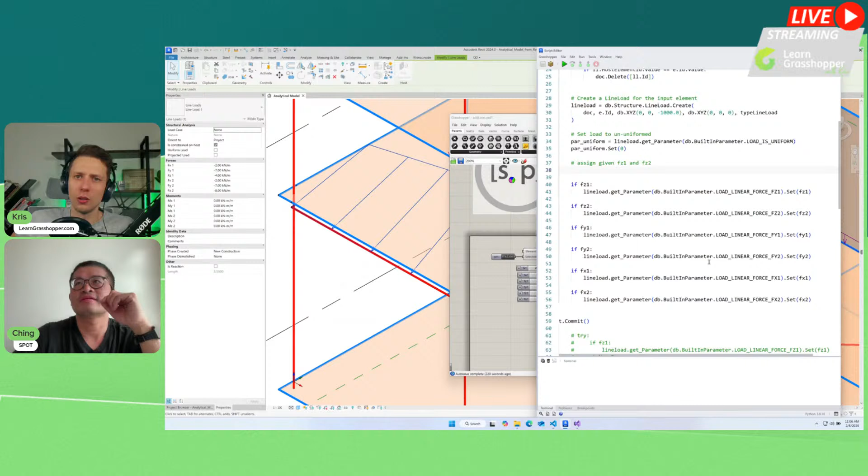So this script you are going to share with people who registered for this workshop, right? So everyone who registered will get it, and on your free time you can go step by step and see how it's working, and also create your own line load.

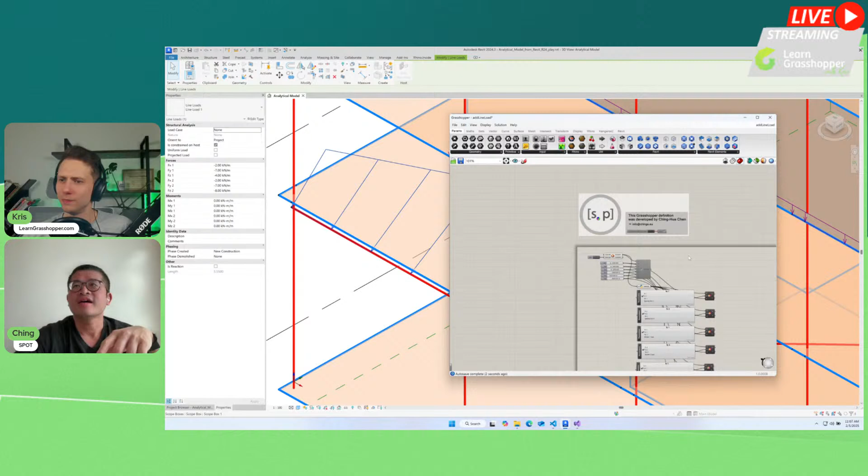Let me just do it a little bit, and you will see in the screen that the load is changing its parameter. The final part is I can just split this script and put it into only one, it's very short. It's only create line load, and the other things like grab the parameter and give it a value. It's already existing in the default component.

So you can also do it this way, and this way you can do it visually, and it makes your script also more clear and more manipulatable. And that's it. This is just for the line load, but you can create the same with point loads, area loads, and so on.

Yes, exactly. What you can get from the API docs, you can go through that. If it's not a Grasshopper component originally, you can go through the Python script.

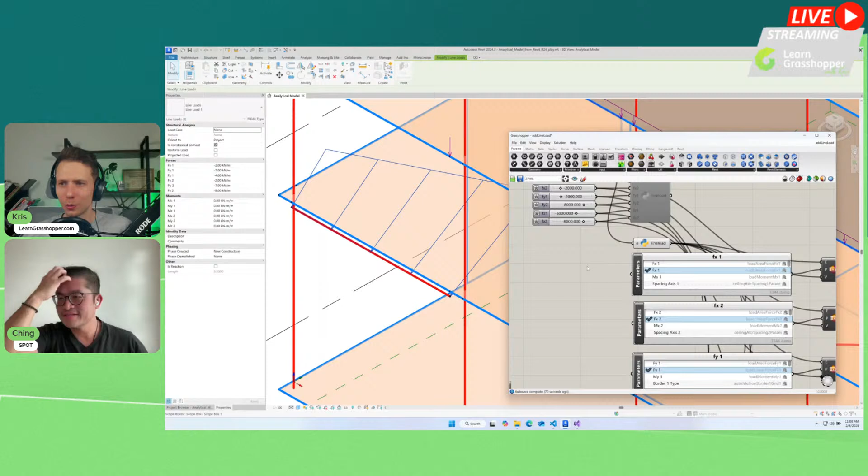Perfect. Okay, let's go to - thank you for this presentation. I think all the audience gets the idea for how it's possible to create it. It's much more complicated than just starting with Rhino.Inside.Revit, but this is how it's done. So we start first with visual programming, then you go to text-based programming, and you create components. So the main idea was to show you that you don't have to give up if you don't see components that you need - you can use Python to create it.

Have you tested, Ching, with ChatGPT to create some Python scripts? Have you tested using AI to create Python scripts? Yes, but not for Grasshopper, for other stuff. And what is your experience?

But basically I would recommend anyway - you need a little bit of programming knowledge, because the GPTs will also make errors and you have to try it. And if there's any error feedback, you can pass this feedback to ChatGPT and it will improve itself. But you still need a little bit of independence for that, and understanding. Yeah, and also sometimes it gets a little bit confused, and the code that it suggests will be even more complex, but you have to know a little bit to tell it, no, this is too much, and bring it back a little bit to what you really want.

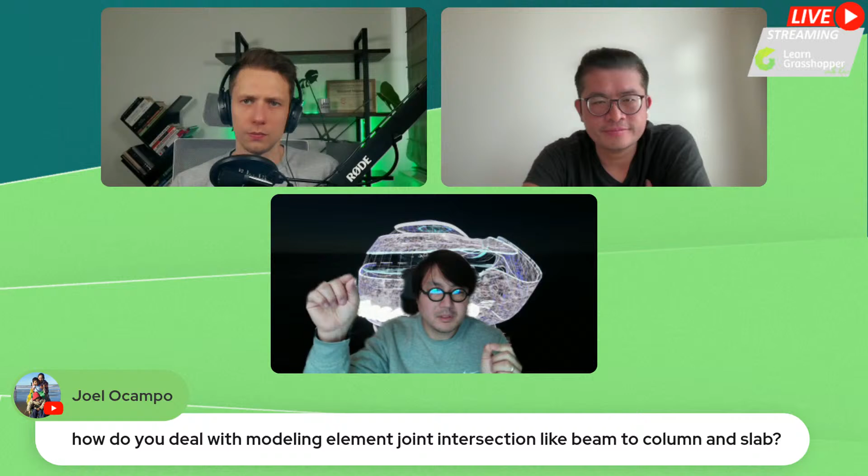My method, if you look at the definition, is I elongate the start and end point of column and beams to intersect with the slab surface. From there, I shatter the line based on the closest meeting point between slab and line. That shattered middle line becomes the final analytical line for the beam. I imagine there are many methods, but that's what I use for this definition.

We really need Grasshopper to handle steel joint part elements like steel plates, bolts, etc. in Revit - at least Grasshopper importing native steel plate elements into BREP elements. Do you have any experience with steel plates in Revit?

Basically, Rhino.Inside.Revit doesn't provide native components for steel connections, but what would be interesting, as Sandra mentioned, is that you can get the geometrical representation of those connections in Grasshopper, and stream this Grasshopper data to Advance Steel or Tekla Structures with their own connector. At this point, I have to agree the steel plates and connections in Revit are not as intuitive as Tekla or Advance Steel.